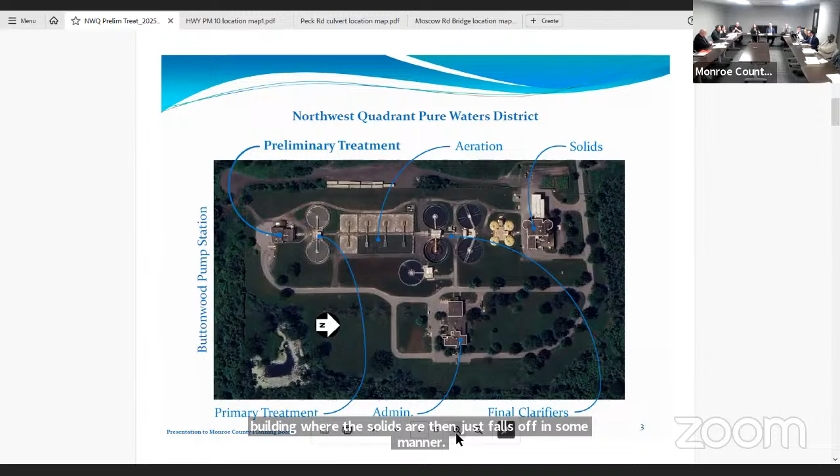That goes into a solids handling building where the solids are disposed of. It used to be incineration, now it goes to the landfill after stabilization. And there's an administration building at the bottom.

So essentially this project is at the front end of the process. Right now we have 1.5 inch manual screens in the Buttonwood pump station. We'd like to decrease that to 1/2 inch screens to take out more solids. Then in the preliminary treatment right at the plant, they're currently 1/2 inch screens.

We want to get those down to 1/4 inch screens to take a lot of the solids out of the process, which helps downstream when smaller pumps that recirculate wastewater with solids in it get gummed up and are really hard to maintain. That's the goal of this process.

So the next couple slides just give you a little bit more detail, probably more than you're going to want to know, but it's okay.

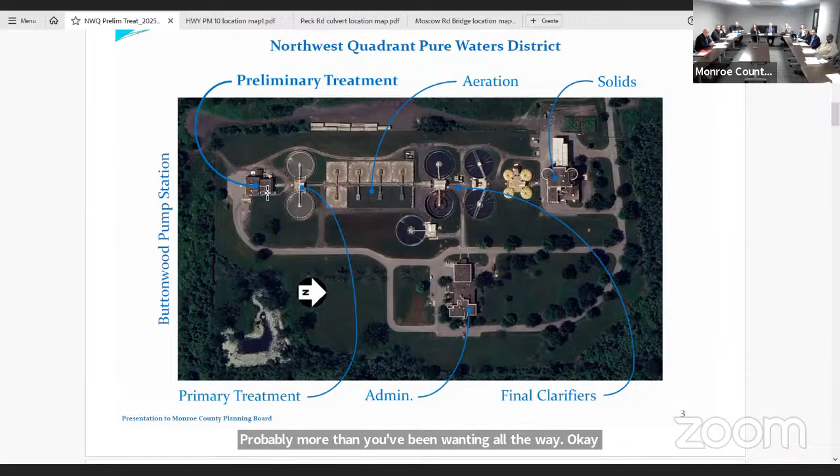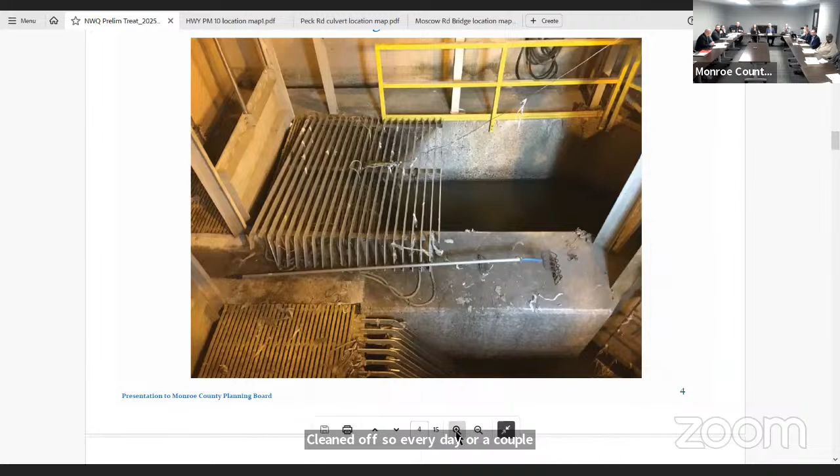This next slide shows what the manual screen looks like in the pump station. You can see it down at the bottom, with a 1.5 inch gap between these bar screens, manually cleaned off. Every day or couple days, crews go in there with rakes, take all the big chunks out, put it into a bin, and it goes off to the landfill.

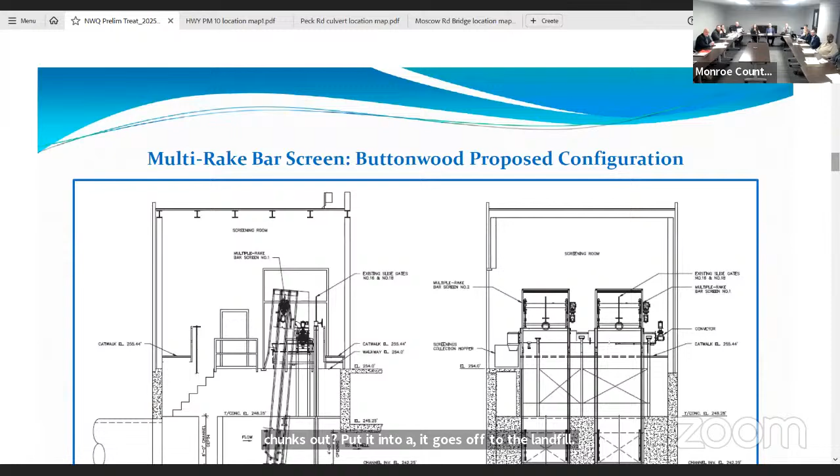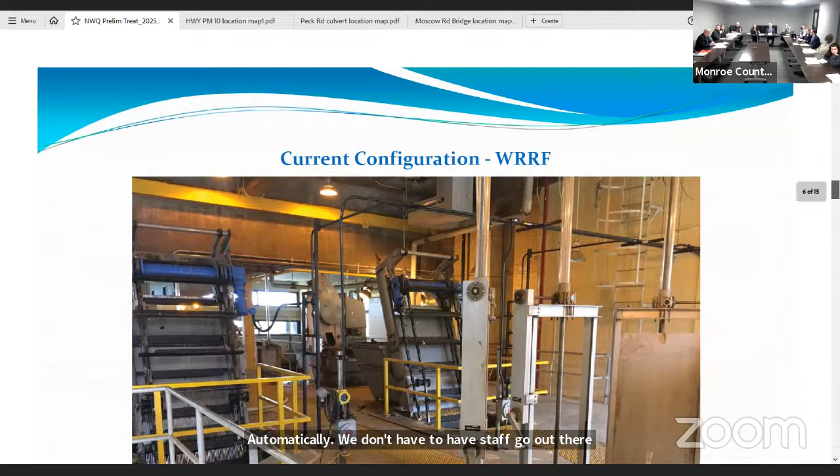What we'd like to do on the next slide is use what's called a multi-rake bar screen. It's basically a mechanical system with a screen where it all happens automatically, so we don't have to have staff go out there and do that. The screens will get smaller, going from 1.5 inches down to 1/2 inch, and they'll be able to take out smaller material.

We're also putting in a process where instead of just throwing a bunch of leaves and garbage into a dumpster, it will go through a press that squeezes out some of the water and compacts it better, so we can haul away less water and more compact material.

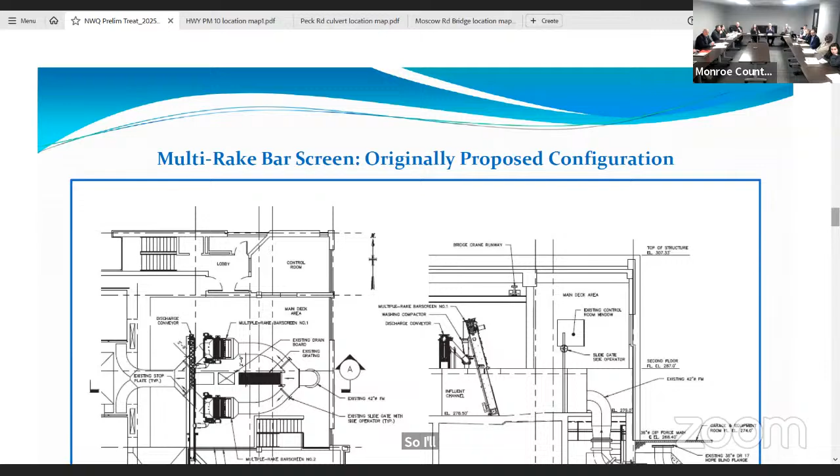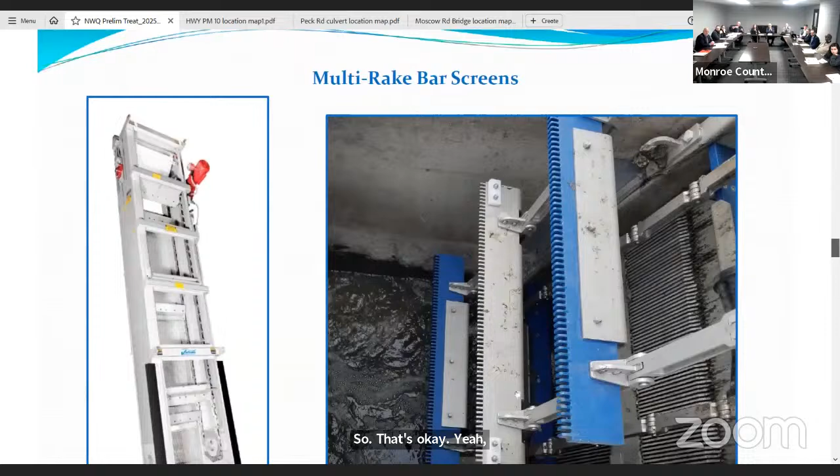So essentially, you can see on the right-hand side this is what the thing looks like. It sits down the channel. On the side you see those 2 little black stripes, let's say that's the part that sits in the channel.

Wastewater goes through it. Then any material that hits up on the screen gets pulled up out of the water with those blue rakes, and then put into a device that squeezes the water out of it, compacts it, and puts it into a roll-off container. So that's what a multi-rake bar screen is.

The openings on the rakes that are on the bars will be 1/2 inch, taking out big leaves, chunks of wood, any kind of stuff that gets down into the sewer. You'd be surprised what people put in the sewer, it's just amazing what goes in there.

How much more stuff will you get going from 1.5 to 1/2 inch? Probably a 4-fold increase of material.

Have we used these elsewhere, or have they been successful? Well, that's what we have now.

So at the pump station, we're replacing the manual 1.5 inch screens with a mechanical 1/2 inch screen. We'll get more material out at the pump station before it even gets to the treatment plant. Then at the treatment plant, we currently have 1/2 inch bar rakes in there now, that'll get down to 1/4 inch, which will get even further material out of there.

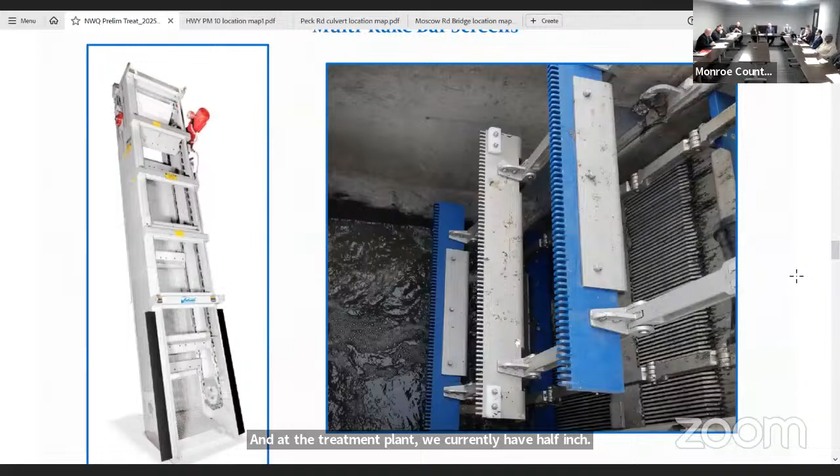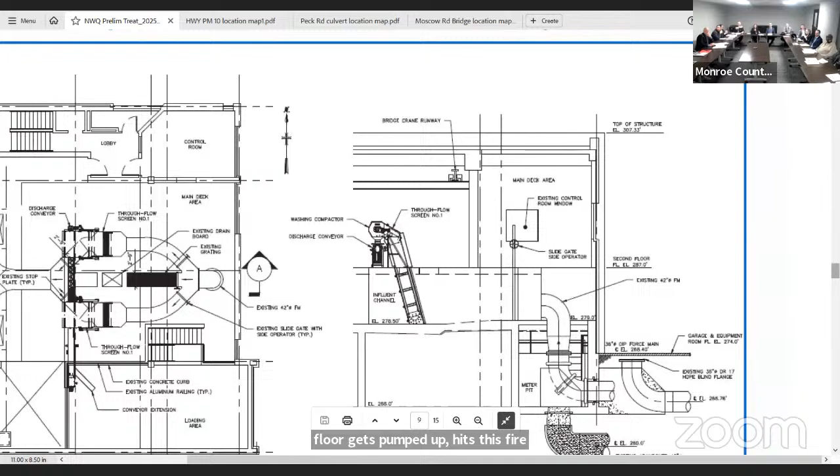So if you go to the next slide, there's 2 types of processes. This will show you what it looks like in an engineering drawing. You can see on the right-hand side, that's the force main that comes in from Buttonwood. The flow gets pumped up, hits this bar screen, and then runs by gravity through the rest of the system out into the lake. On the next slide, this will give you an idea of what the through flow looks like.

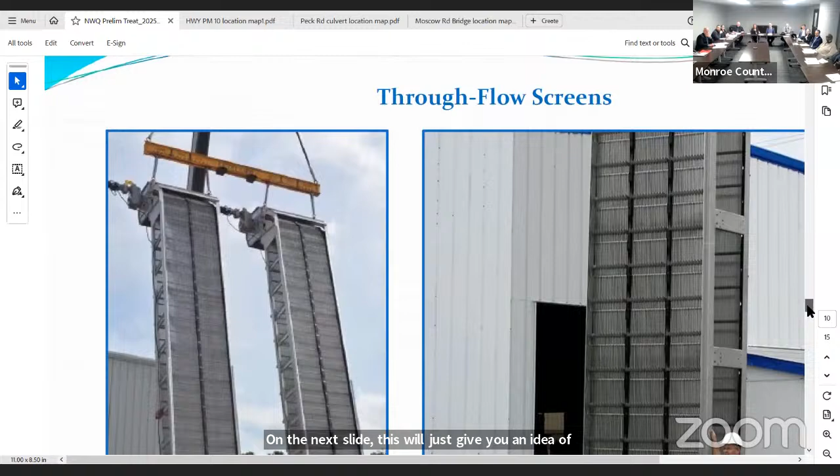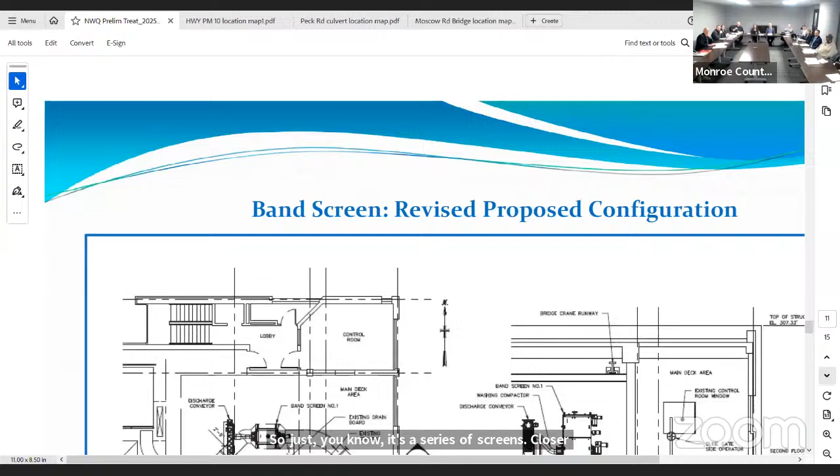So it's just a series of screens, a lot closer opening, so that we get more material out of it. And then this next one is a band screen, which is a similar device, but this runs perpendicular or parallel with the flow.

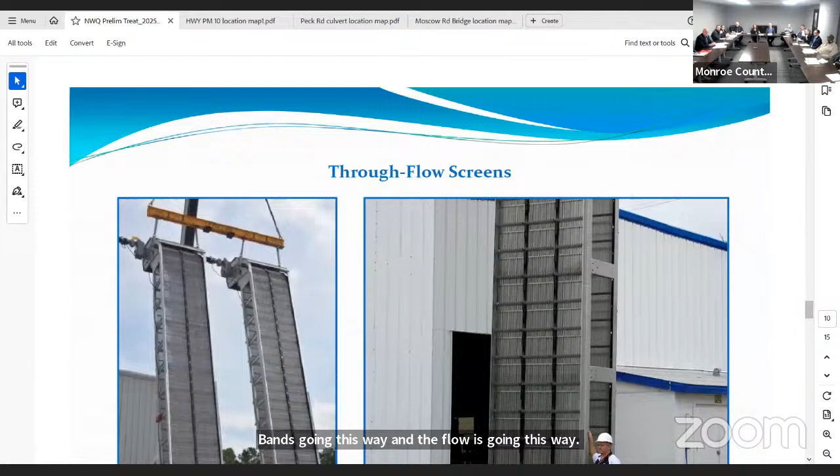So in the case of the flow through, the flow comes in as the screen goes up like this, the flow's going this way. In the band, the band's going this way and the flow's going this way. So it's just a little bit different technology, but the same level of screening will come out of both devices.

And those will be evaluated and designed once we get into that process. So if you go to the next slide, it just shows you what it looks like - a big chunk of metal. The next slide just summarizes a little bit of what's going on with it.

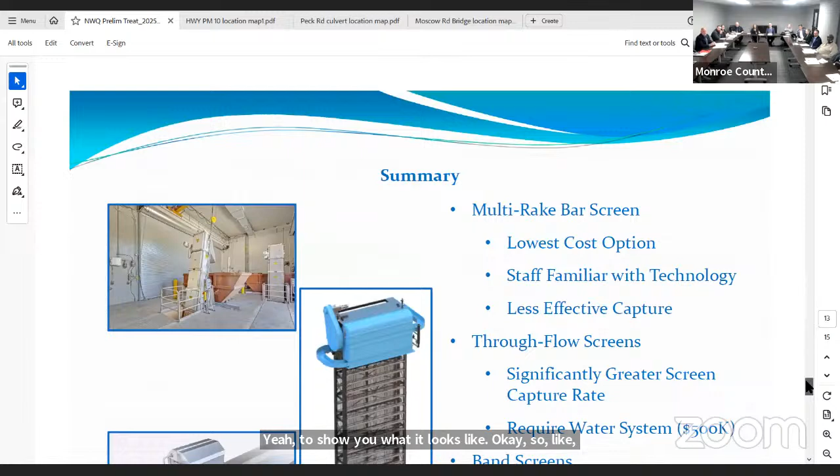So right now we have the multi-rake bar screen, and we had 3 options that we were looking at for the project. What's in the CIP right now, the $4 million, is based on the multi-rake, just basically renovating the one that's in there now, making it from a 1/2 inch to a 1/4 inch opening, just keeping the same basic technology in place. That's where we came up with a $4 million estimate, escalated out to a construction date of 2028, which is when the project would happen.

But in the process of having this in the CIP, we got an opportunity to apply for a federal grant - it's a congressionally designated grant. I don't know exactly which one it was, but there was an opportunity to get a $2 million grant from the federal government. So with that, we decided that we would increase the capital fund by the $2 million and then be able to look at the higher efficiency and smaller screen opening size of the through flow or the band system.

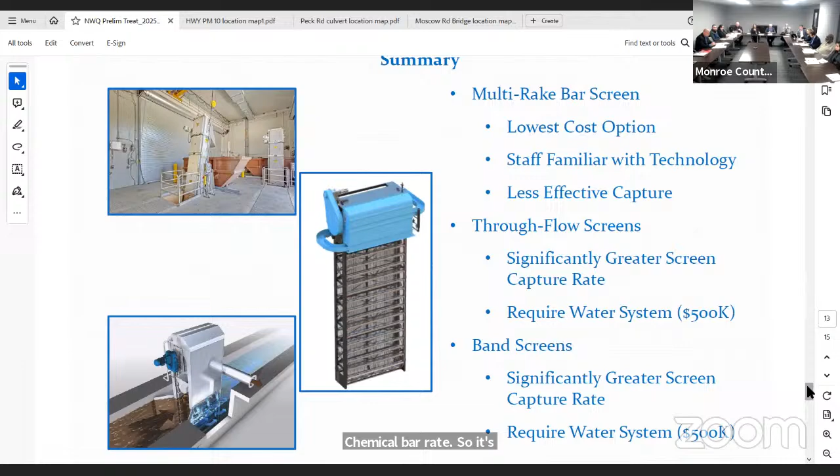But with those two systems, there's an additional amount of effort that has to happen with a plant water system that's used to clean up the screens, more than just what we would do with the mechanical bar rake. So it's about a $500,000 additional cost. If you go to the next slide, this will give you where we came up with the estimate.

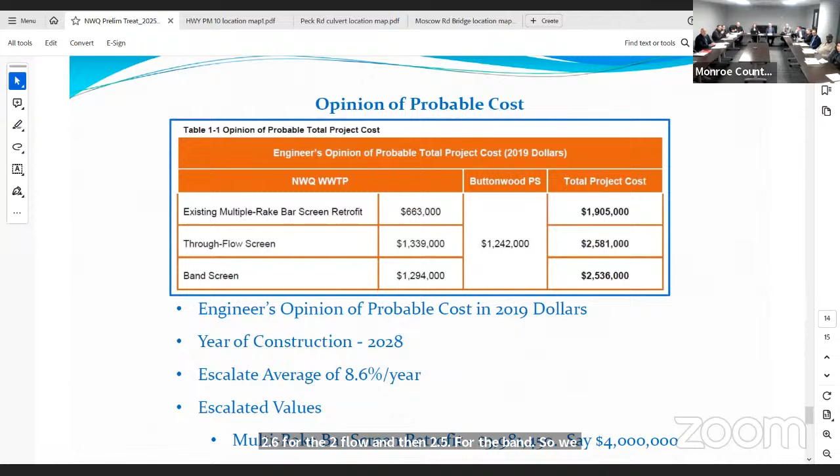So the engineer back in 2019 had come up with these estimates: 1.9 million for the modification of the existing multi-rake system, 2.6 for the through flow, and 2.5 for the band. So we added escalation, again, construction happening out in 2028. Based on what we've seen for escalation so far, we averaged about 8.6% per year.

In the early years, in 2021 before COVID, we used 5%. When we got into COVID, we just bumped it up to 8 and 10% through the rest of the project. And we're still seeing, in some cases, those double-digit escalation costs, depending on what the material is. These are heavy steel, metals - all the materials that generally carry that higher escalation cost.

So with that, we revised the estimate. You can see the $4 million - so the way we originally presented the project, it was going to be a $4 million project, escalated out to 2028. And now, with the ability to potentially pick up the extra couple million dollars from the federal government, we went through the two other projects at $6 million each.

So with that, as the project moves forward, we'll do the design. If it does turn out that the grant's not available, we would obviously go back to the $4 million project. It's still a viable technology. But at that point, we could even do a design based on the other technology and put it in as a bid alternate. And depending on how prices came in, we still may be able to get the better technology.

And this better technology, back to my previous question - the better technology, that's proven? Yes. Okay. So when will this be installed, starting?

So this is in the 27 year, so it'd be 28. We do design in 27 when the fund came about, because we couldn't start design until we had the money, and then construct in 28.

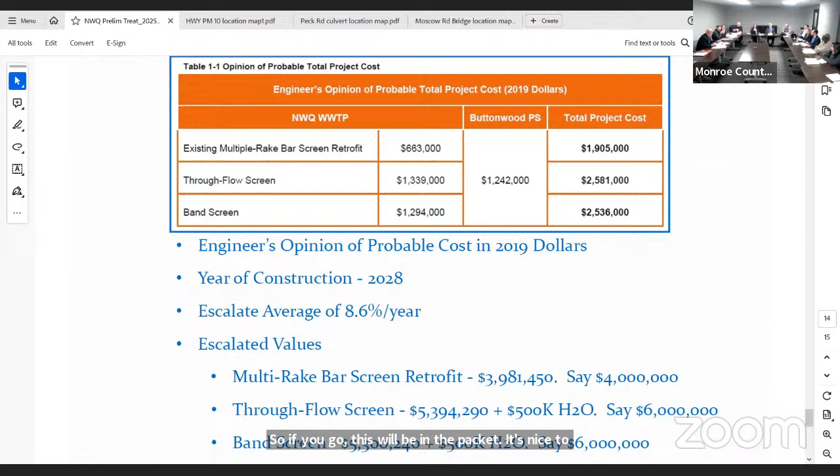For information, this will be in the packet. It's nice to see the layout of the plant because in the CIP you'll notice we have an aeration project, electrical project, and for those inclined you can always go back to the drawing and see where that's going to happen. We'll explain more as we move forward, but this gives you an idea. We'll make wastewater people out of everyone here.

From a progress standpoint, we've sent a plan to the legislature, and we sent the recommended version that this board approved last month. We've also submitted a referral for that to move forward. We were notified of this change and immediately contacted the county executive's office to go through this process, so we could update the recommended version to match what is being requested, so the board will only need to vote once with the changes and revisions included.

Any other questions on this motion and second? Is the major reason for the change, besides the grant money possibly becoming available, less maintenance on the smaller pumps? Is that the main purpose of the change?

Going from 4 to 6, well going from the inch and a half down to half inch. So the project at $4 million, we're taking half-inch screens. Well, we're doing two things: we're taking the 1.5 inches down to half-inch at the pump station, and we're taking half-inch to quarter-inch at the treatment plant as part of the $4 million.

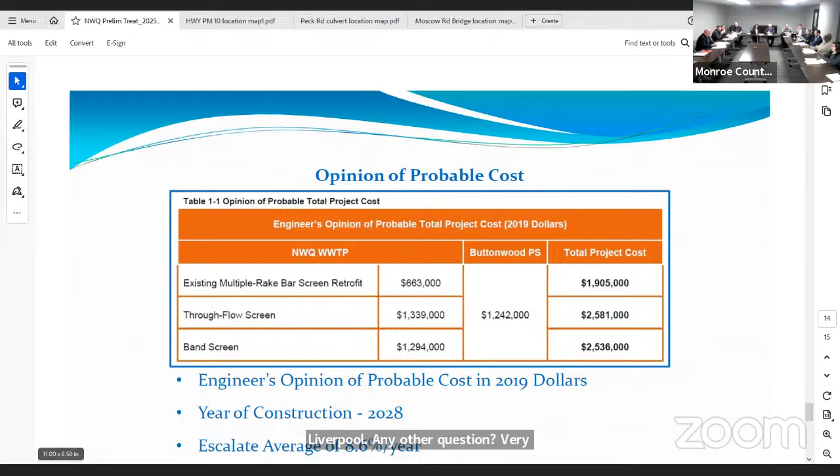Any other questions? Hearing none, all in favor, please signify by saying aye. Any opposed? Any abstentions? Great, motion is approved.

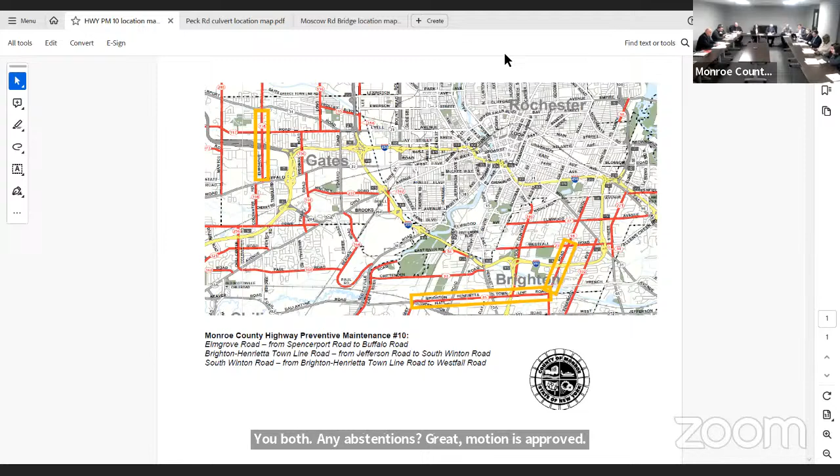Thank you, thank you. Hey Pat, this exhibit was great. Was it prepared primarily because we were between the board proposed part of the process and the legislator approved? Yeah, correct. It's slightly odd in the way this is being changed, so we wanted to make sure it was very clear to the board members. I was thinking, if it isn't too heavy a lift, for every amendment throughout the year we need to see how the numbers are changing. Can't make that promise, but you can consider it.

Thank you. So the next item on the agenda is to amend the 2024 capital budget to increase the project authorization by the amount of $1,650,000 from $8,025,000 to $9,675,000, for a total project authorization of $9,675,000 for the project Highway Preventive Maintenance number 10 in the towns of Brighton, Henrietta, and Gates.

I need a motion for that, please. Sean, thank you. Need a second. I'll second. Thank you, Mike. And is there a presenter? Tom is here. Hi, Tom. Hi, how are you? Great, thanks.

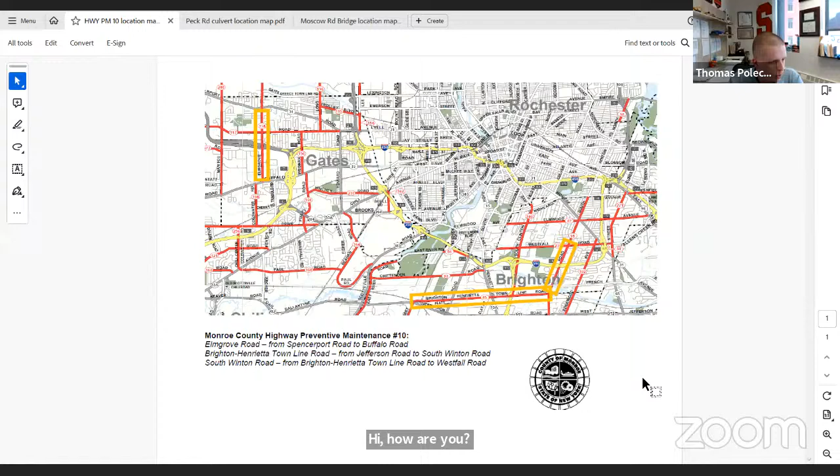I believe Ishan has a location map. So this is what I have, I can answer any questions if there are any. Basically it's a basic mill and resurface project. We will be installing bike lanes on parts of Brighton Henrietta Town Line Road, away from the major intersections, but mid-block we'll be installing bike lanes, and there will be some concrete sidewalk installed on Elmgrove Road on the east side between Lyell Road and Spencerport Road.

Any questions for Tom? Tom, what's the major change here consist of?

Okay, great. Talking about cost. Does that cover the 1.6 million adder? Is that what that is? Actually, the majority of the overage was for the sidewalk, so that was a request from the town of Gates late in our design, which was not part of the initial funding that we applied for.

So we did agree to include it in our project. We're expecting to get 95% federally reimbursed, and then the town of Gates will be covering the 5% local share for that. So the majority of the cost overage is that, and then some of it's just for inflationary reasons in construction.

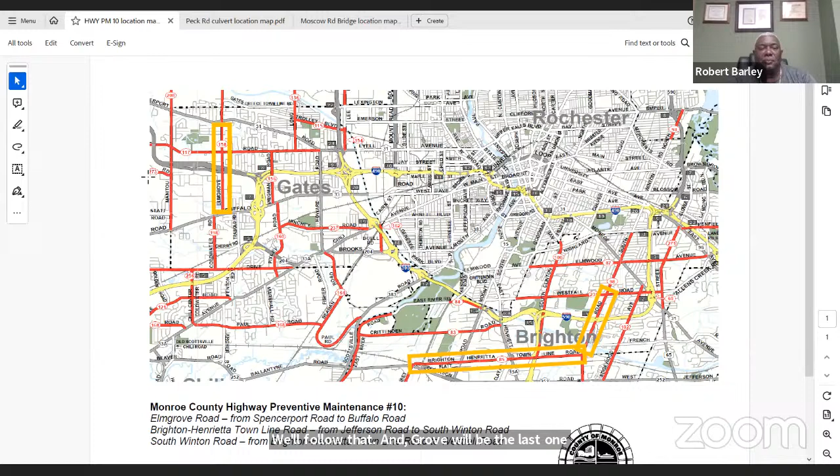Okay, thanks, Tom. Sure. Okay, great.

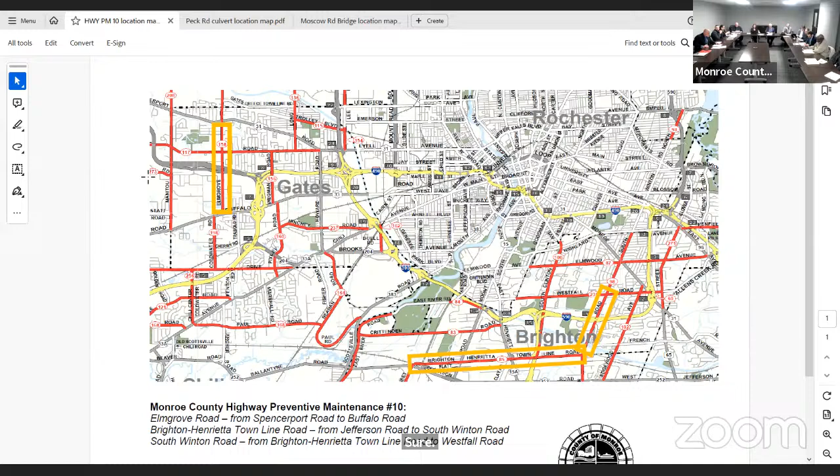Next item on the agenda is to amend the 2024 through 2029 CIP and the 2024 capital budget to add a project entitled Peck Road Culvert in the amount of $898,000. I need a motion for that, please.

Thank you, Rachel. Is there a second? Second. Thank you, Andrew. Tom, are you back up for this?

Yes. So as you can see there, that's the project location of the culvert. Basically, the reason for this is that we received Bridge New York funding, or I should say Culvert New York, since this is a culvert, which had to move up our schedule that we originally had. So that's why we're requesting this one.

And so the latter years in this CIP will be adjusted. This is for the 2024, 2029. Gotcha. Oh, so it wasn't even part of it originally, right.

Any more questions for Tom? Hearing none, all in favor, please signify by saying aye. Aye. Are there any opposed? Any abstentions? Great, motion is approved.

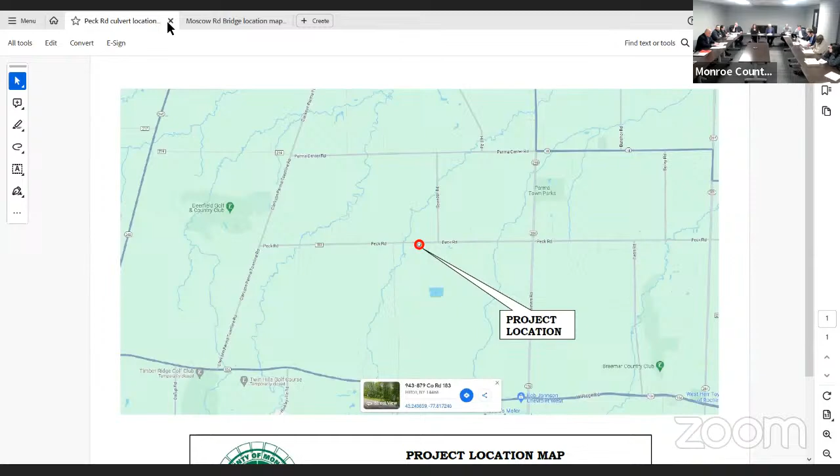Thank you. Last one, item D: amend the 2024 through 2029 CIP to advance the Moscow Bridge project from 25 to 24, and amend the 2024 capital budget to add a project entitled Moscow Road Bridge Project in the amount of $355,000. I need a motion for that, please.

Thank you, Sean. Is there a second? Second. Thank you, Richard. And I take it, Tom, you're back up. Yes, I am.

So on the screen is the location of the bridge. Again, this one we received Bridge New York funding for, which is 95% federal funding. So we're just moving this up. It was already on our county CIP to be county funded, but since we've received federal aid, we're moving it up to meet the schedule that's required.

Tom, you're selecting these two last projects based on their condition, I assume. Yes, that is correct. So every four years, including this year, some of our project managers and interns go out to every bridge and culvert on Monroe County Road. We inspect them visually, and also the state DOT inspects bridges every two years, structurally and visually. Based on those inspections, we prioritize what capital improvements are needed.

And your New York ratings are, if I recall, 1 through 7? Yes, that is correct. And then the county ratings are 1 through 4, 5? I believe it's 5, yes. Okay, good.

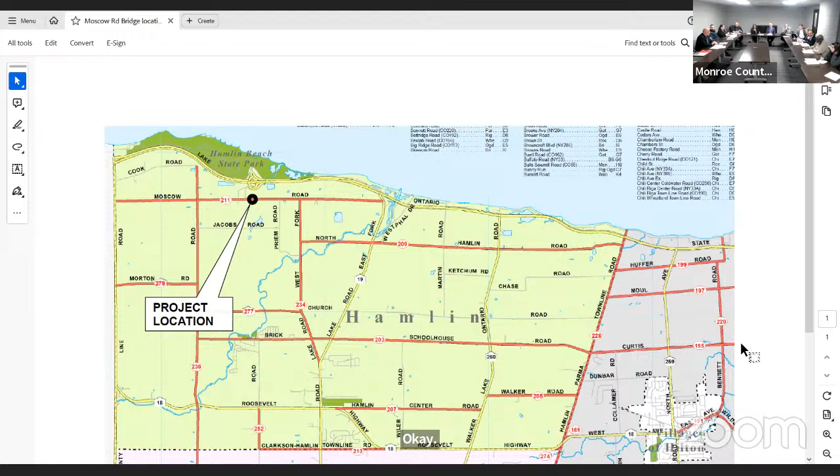All right, any other questions for Tom? All in favor, please signify by saying aye. Aye. Are there any opposed? Any abstentions? Motion passes.

Nice job. Thank you.